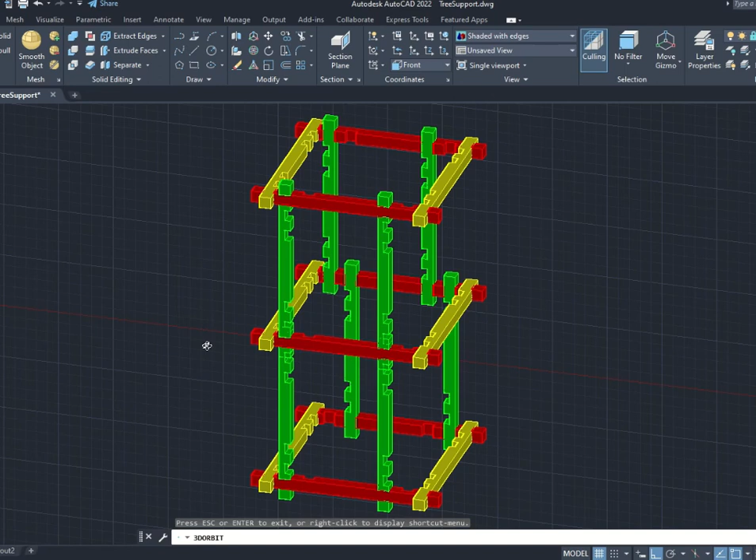Okay, I am using AutoCAD to create this tree support structure. You can see this support structure is made up of many bars and columns, and each bar and column is the same. And I'll show you how you can create this column or bar. And now I'm showing it in the southwest isometric view.

I'm using the DIST command to measure the distance of this bar so that you can see the dimension of the bar. The total length of the bar is 170 millimeters, and the section is a square, 10 millimeters by 10 millimeters.

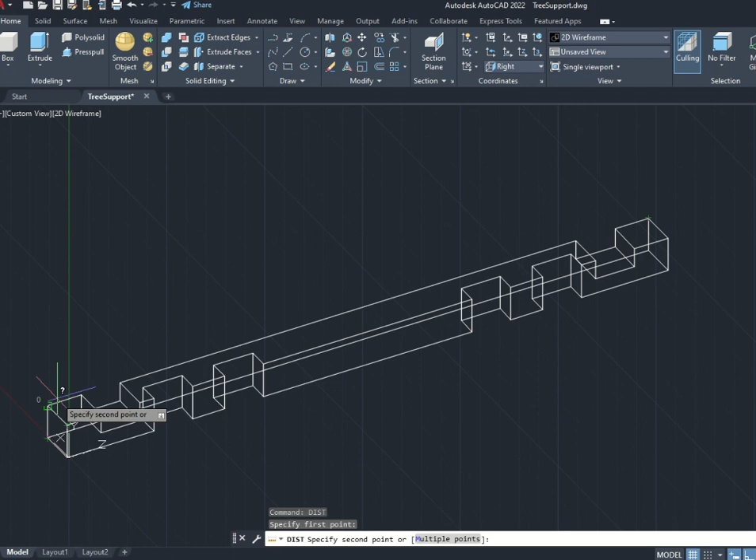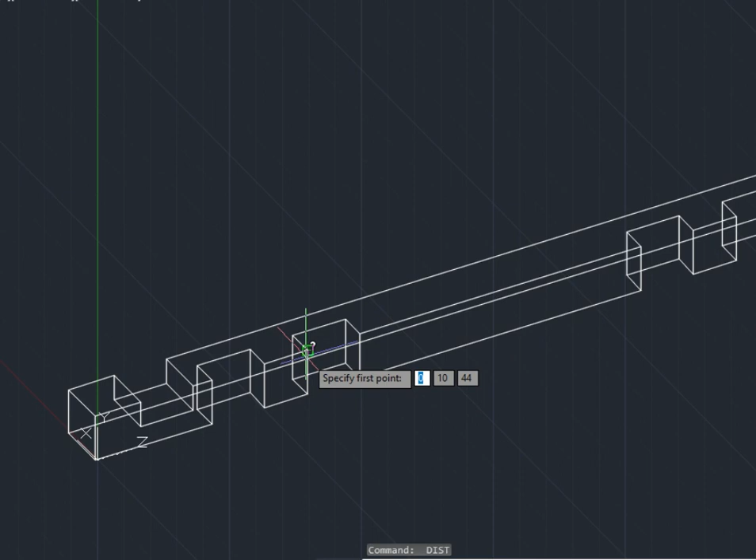From one end, I go down 9.5 millimeters and cut a hole of 11 millimeters with a depth of 5.5 millimeters. The same cut is applied to the other end, and on the front part, I cut a hole from 24.5 millimeters, a hole of 11 millimeters with a depth of 5.5 millimeters. Another hole is in the next section. Measure 9 millimeters more and cut a hole of 11 millimeters, also 5.5 millimeters deep.

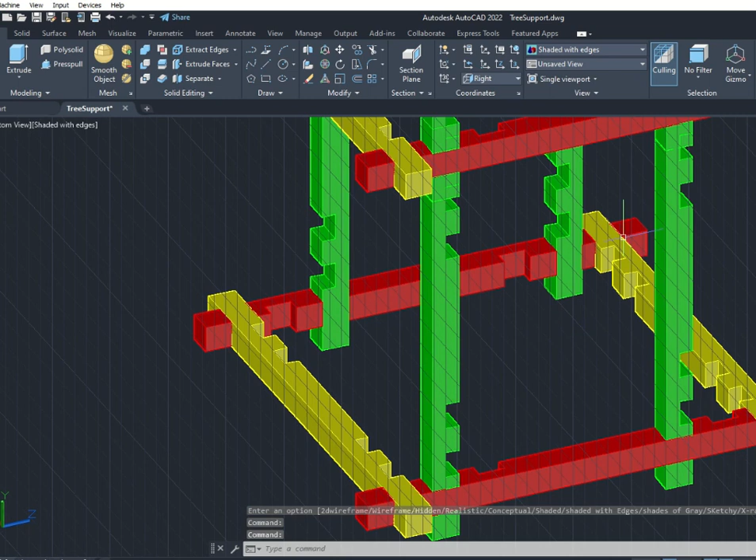So that is all you need to create the horizontal and the vertical bar, because this structure is created with the same bars everywhere. Here I show you the whole structure again. I change it to the shaded with edges view so you can see the structure is fixed against each other horizontally or vertically. I may need 20 bars to create this structure.

Okay, after I've created this structure, I want to save this bar in STL format so that the 3D printer can print it out. So in AutoCAD, I have saved the drawing. Besides that, go to export and export to other formats. Here, the format should be STL. Most 3D printers can recognize this format and print it out. The name is tree support.stl and then save.

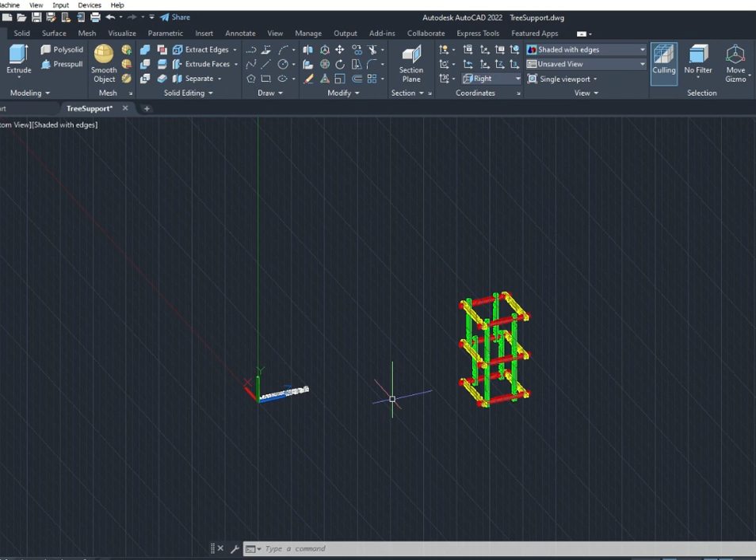After I have saved this structure in STL format, I can go to the STL software. I'm using the Repetier software to create 4 bars each time, and this may need 3 to 4 hours to print out 4 bars. If I want to print this structure, I may need 20 bars to do this. Let's see how we can print in the 3D printer.

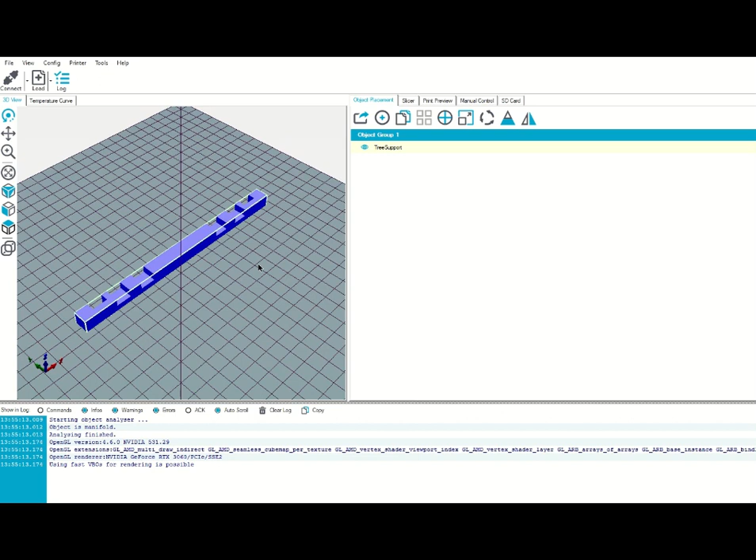Okay, when you have finished creating the STL files, you can right-click the file and go to Open with Slicer. I'm using the Repetier-Host slicer. After you have opened the file, you can see one of the structure bars is here. I click the Add button to add one more STL file. You can see 2 of them. We do it 2 more times so we can have 4 of them.

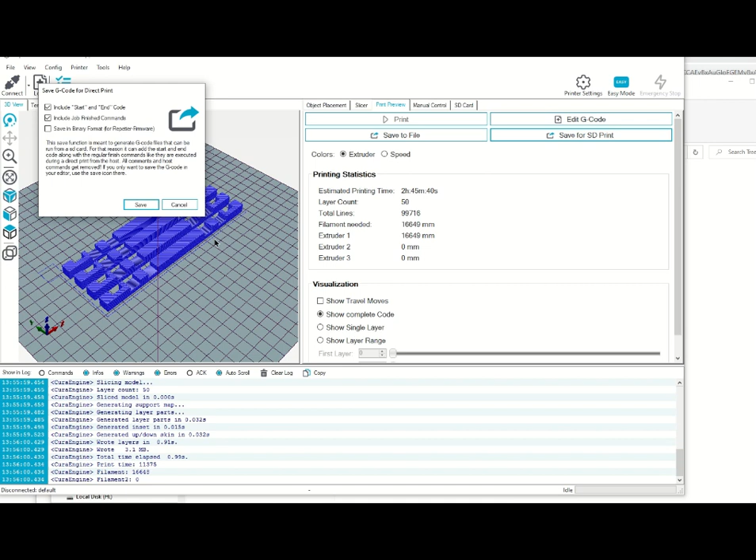After you have created 4 of them, you can click the Slicer button and slice with the CuraEngine. There are many engines for creating the 3D model; CuraEngine is one of them. So I click here to create the file. After you have created the 3D part structure, you can click Save for SD print, and it will save in G-code format, which most 3D printers can recognize. So I select a folder, name it tree support.gcode, and click Save to save the file.

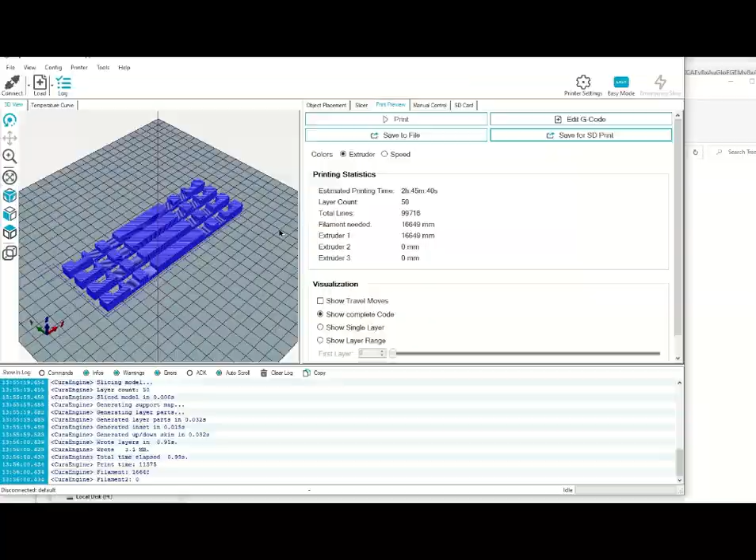Okay, now you can take this G-code file to the 3D printer and print it out. We can see how we print it out later. I'm printing the skeleton of a supporter to support the plants. I'll show you how to use this skeleton later.

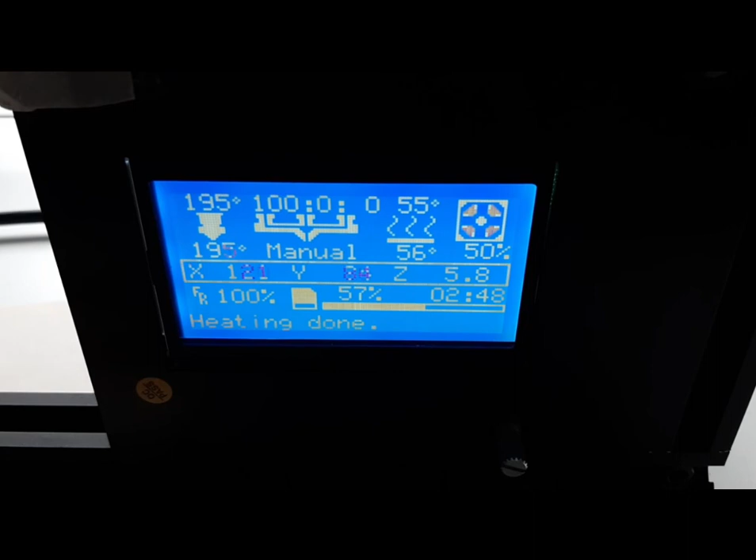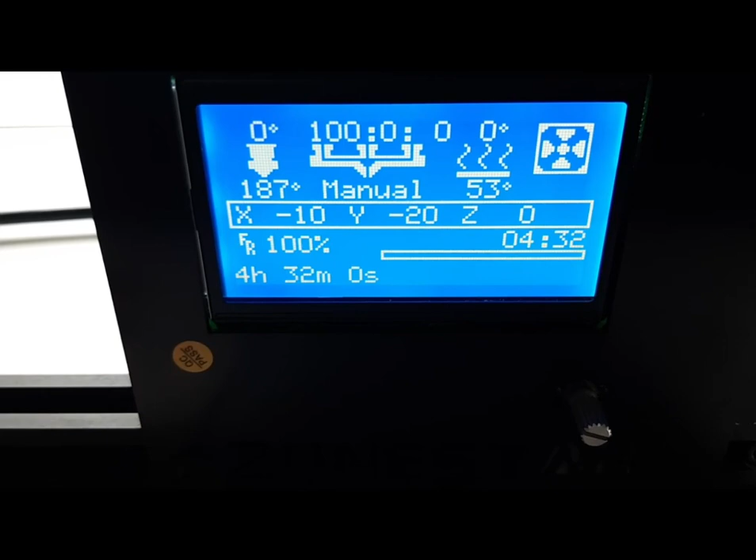The model has been printed up to 57%. This is how the model looks at this moment. Okay, let's go to 99% and then 100% now. And you can see the model is taking shape, and the printer head goes to the home position.

Okay, now you can see I have printed 4 structural bars, and if I want to assemble it, I take the structural bars like this, facing this way, and then I take another bar to fix it in. And you can see it's very loose, right? Because I want to reuse this structure, I made it loose.

I'm using a rubber band to fix it together. That's one corner, and I also fix the other corner as well. And then this one is going this way, with the rubber band. I could also use screws to screw these sticks together if it's the final structure and I never remove it again, but I want to remove it when I move to another house, right? So I use a rubber band rather than a screw.

Okay, it's very fixed. I need to print 4 more columns, and I will print the 4 column bars tomorrow because today I'm very tired. Very nice, right? A structure like this. It's a nice structure. I'm very satisfied with it.

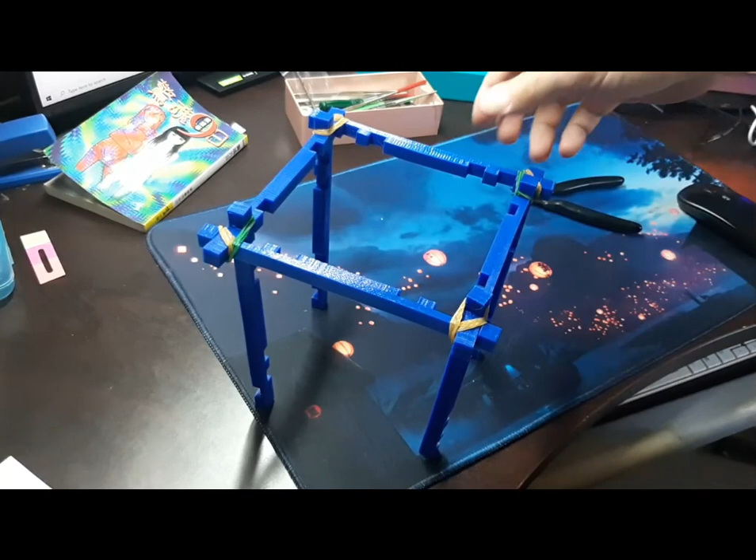Now we've got another 4 columns here and tied them up with rubber bands. Bingo, we got a structure like this. We use this skeleton to support the plants. Now you can see the plants. We want the leaf to go up like this. So I make this one an open end.

Put it inside the plant. One more bar. Use the rubber bands to tie it up. Use another rubber band to tie this up as well. So you pull it up, and then you use another column. Use the rubber band to bind it. Hold it up like this.

The column goes down into the soil. You also tie this column as well. The last 2 columns. The last one here. It's also going this way. Bingo, you have 4 columns, and this is a homemade structure to hold the plant up. You can also build more levels of this structure as well, but here I just built one level.